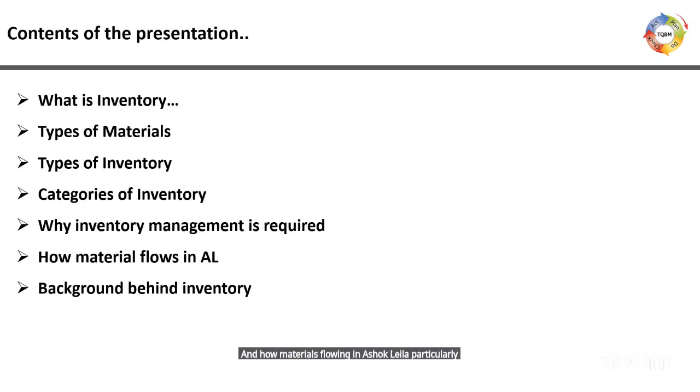So what is inventory? These are the contents we are going to cover: what is inventory, types of materials and types of inventory, categories of inventory, why inventory management is required in industry, how materials flow in Ashok Leyland particularly, and the background behind how we are managing inventory in Ashok Leyland.

So what is inventory? The term inventory refers to materials including raw, BOF (bought out finished), and work in progress, etc., used for production, as well as goods produced that are available for sale, which includes the complete produced vehicle also. It comes under the inventory of any industry.

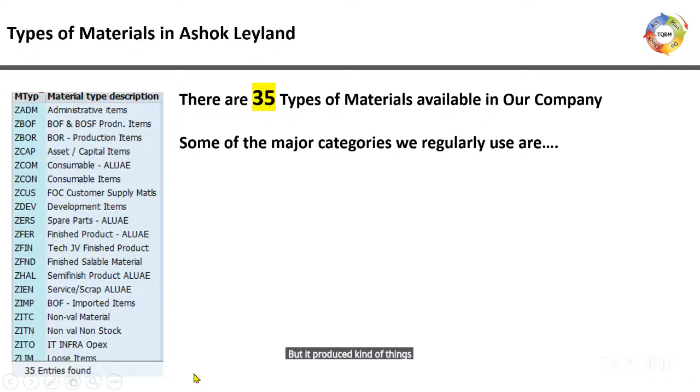Bought out finished is completely finished material having an application of doing some activity in the vehicle. Imported parts, basically some critical parts like sensors and copper related items, all these things come under imported parts. Consumables include gloves, diesel, and other things.

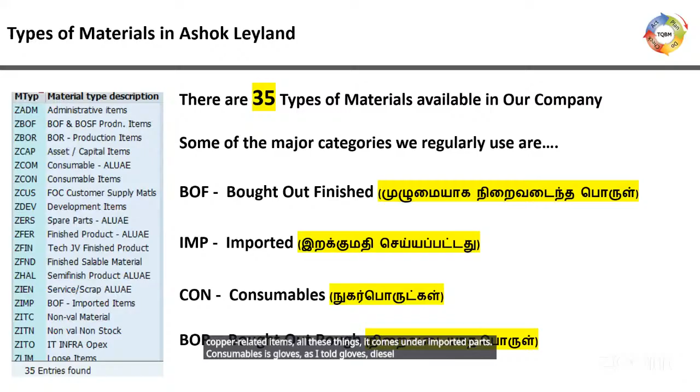So some examples I'm showing here. Bought out finished is like radiators, which have a cooling application in the vehicle. The exhaust systems, which is the exhaust after-treatment system - after BS6 introduction, this plays one of the major roles in vehicles. And draglinks, which is part of the steering control mechanism.

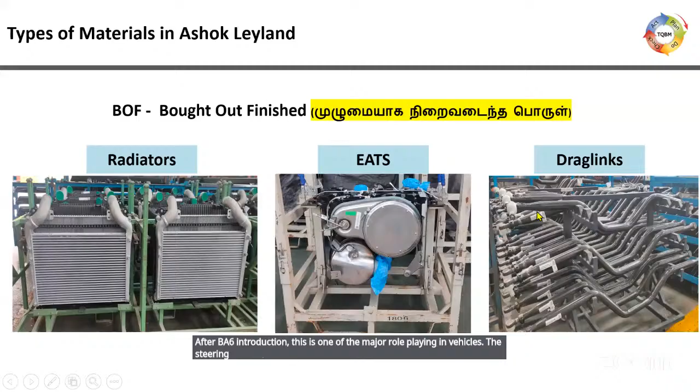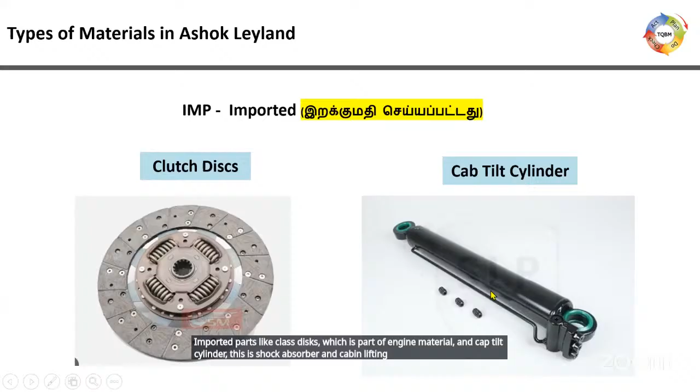Imported parts like clutch discs, which are part of engine material, and cab tilt cylinder, which is for shock absorber and cabin lifting purposes. These are the imported parts which we handle in Ashok Leyland. And consumables, as I told you, gloves, diesel, paintings, and other personal protective equipment - all these things come under consumables.

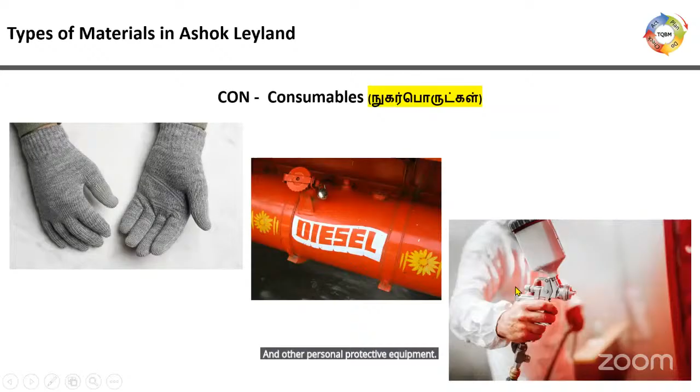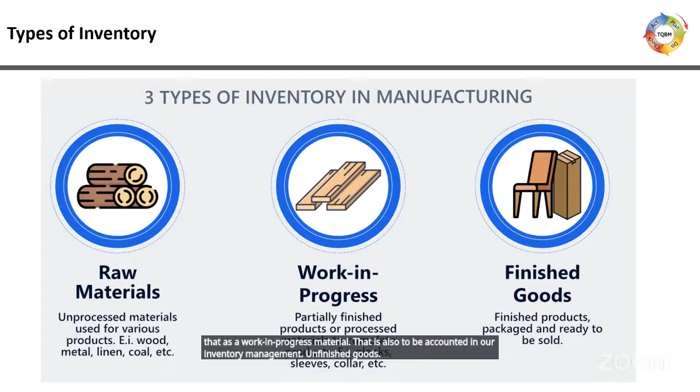Types of inventory. We have three types of inventory in manufacturing. One is raw material, unprocessed materials used for various products like wood, metal, coal, and sheet metal components like coils. Work in progress is partially finished, incomplete product in the assemblies, materials which are ready to come out as a finished part. Up to that point we consider it work in progress material, which is also accounted in inventory management. And finished goods, once the part is ready to be sold, is called finished goods. These three things are mostly related to all kinds of industries.

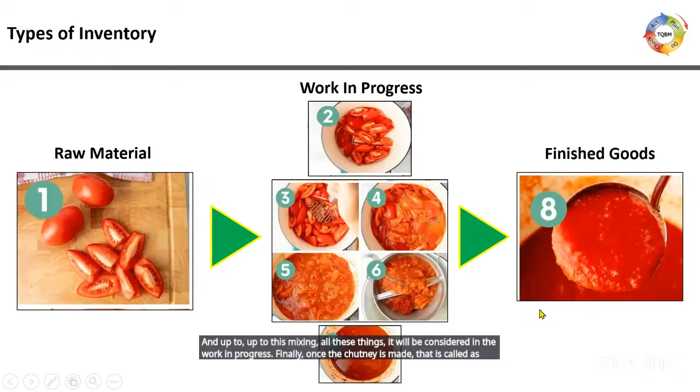For easy understanding, I've made this example of how to make tomato chutney. The raw material for us in this process is tomato. In work in progress, we cut and do the preparatory work, and up to the mixing stage, it is considered work in progress. Finally, once the chutney is made, that is called finished goods that we can sell or eat. This is given for easy understanding.

Categories of inventory in Ashok Leyland: one is moving inventory. Not only in Ashok Leyland, but in every system and industry, there should be three types of categories of inventory. The terms may vary, but in Ashok Leyland we call it moving inventory, slow moving inventory, and non-moving inventory. Moving inventory refers to parts having regular consumption on a day-to-day basis, parts which consume a higher amount every day, that is called moving inventory.

Slow moving inventory is like order basis. Some materials we procure on order basis, like defense material, which we produce based on tenders or orders only. So we call that slow moving inventory. Non-moving inventory refers to parts not moving for more than 1 year, parts which we procured but are not using for more than a year due to various reasons like plan cut, order cut, or order cancellation. We call that non-moving inventory.

Accordingly, the storage system of materials will also be as per this categorization. Moving inventories will be in the accessible area, slow moving inventories will be stored in the middle of the racks, and non-moving will be at the top of the rack or away from the regular location. This is how we store materials for easy day-to-day operations.

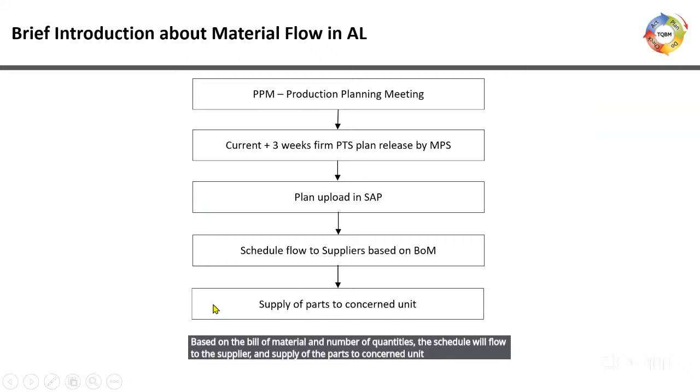So this is the rolling plan, and I am attaching this bill of materials, how this will be in the SAP.

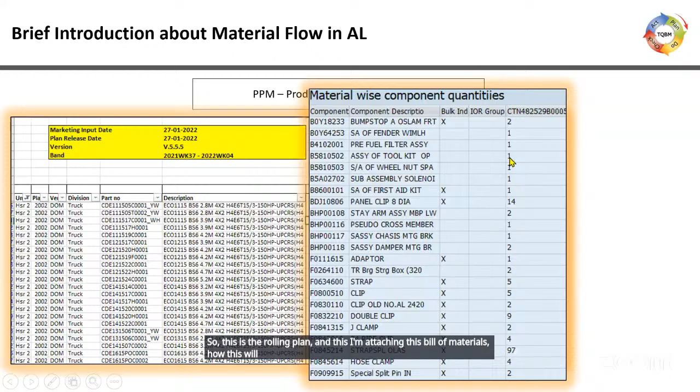So this is the stock requirement list. Each part will have a unique part code. If we enter the part in SAP, the complete entire master data will appear in the SAP. There is a thing called the T code, that is transaction code. Each transaction code will have a different application. For material management, we have plenty of codes in that. I'm showing this requirement list.

If we give the indent to the supplier, when can the supplier give the material? PDT is planned delivery time. If I give today, he could able to deliver the parts in the next 6 days. That is how it should be.

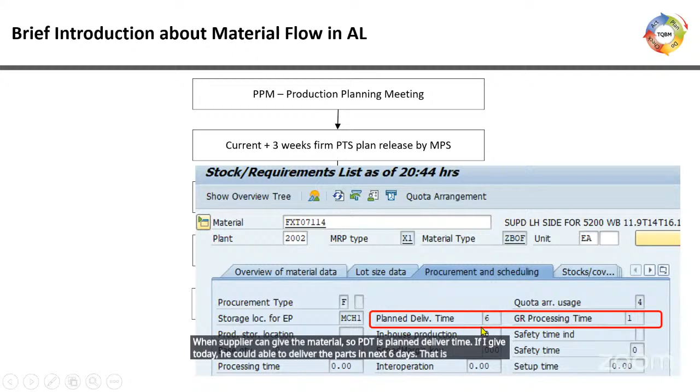Parts receipt and feeding: once the part is received from the supplier, we need to appropriately account the materials, even one number, since we are paying to the supplier for each and every number. That has to be properly accounted, checked, and received. Based on the shipment notice, gate entry will happen. Accordingly, checking methodology follows. After that, goods receipt note will be happening. Based on that only, we are paying the suppliers.

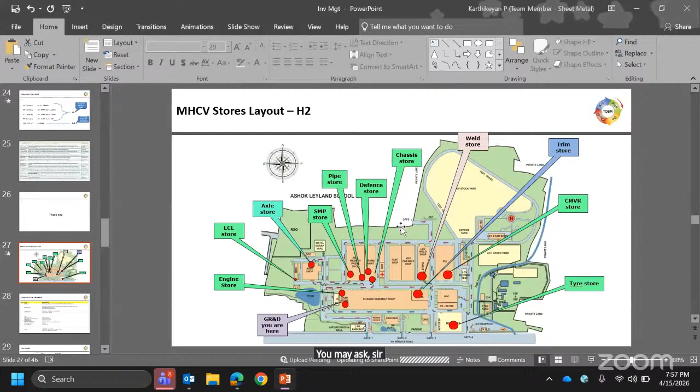Thank you, Karthikeyan. This is Loganathan. It's really a wonderful thing, a new thing for us, other than mechanical engineers, managing a huge quantity of materials. You have narrated it very simply with all the diagrams. Thank you very much. So many things are there in the management of warehouses, and you have explained it all very neatly. And one more thing, this warehouse and e-commerce business is booming like anything. It's going to be the next game changer in the industries. Online buying is periodically increasing every day, from food to everything, now becoming online. I think people will select from home itself and buy. So warehouse is an inevitable one, so management of that is excellent. Thank you very much, all the best, thank you for sparing your valuable time, sir. Thanks for the opportunity.